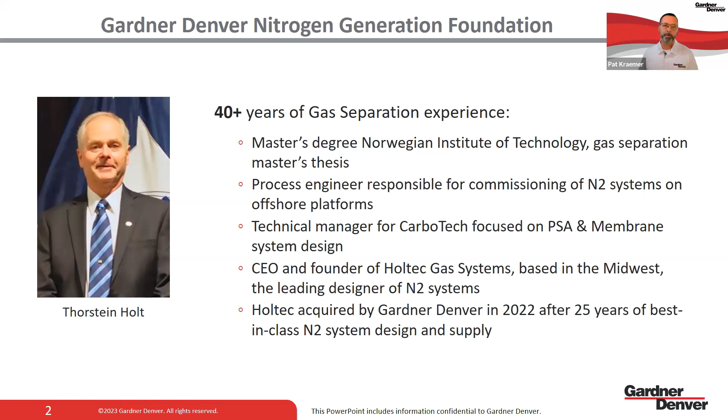Now let's show a little video.

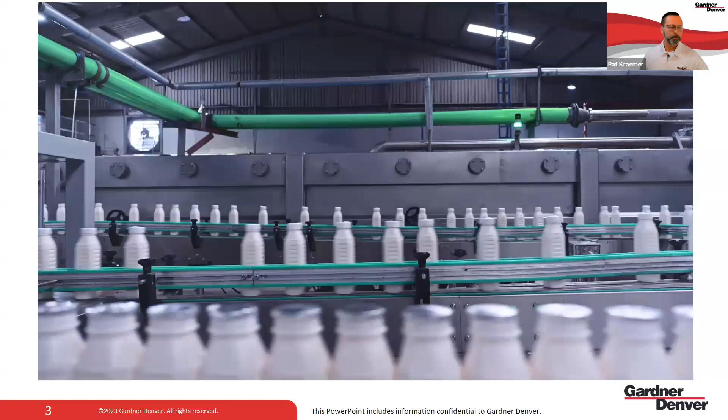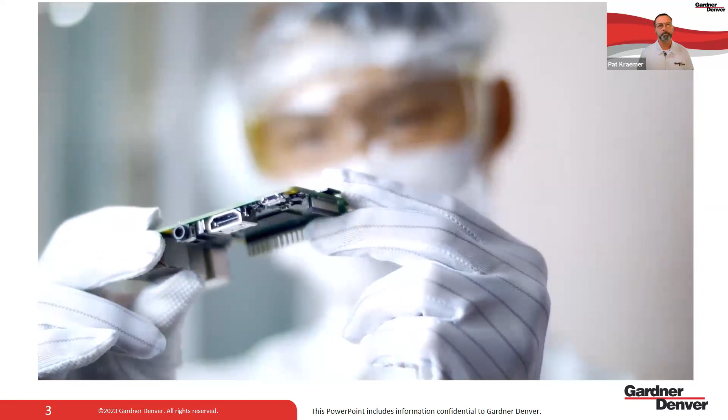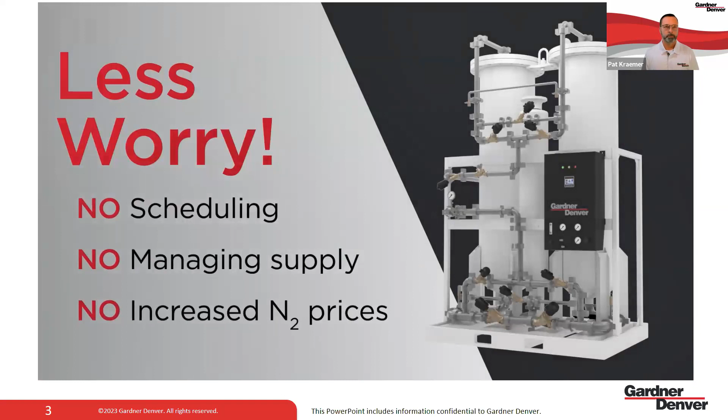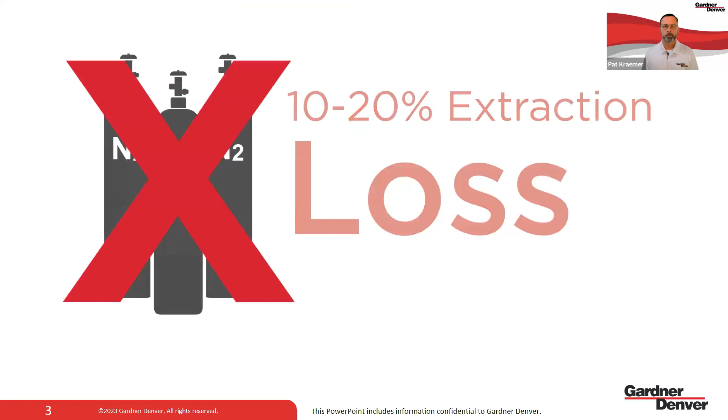When nitrogen is critical to your operations, you can't afford to worry about scheduling deliveries through an unstable supply chain or managing fluctuating costs. Traditional delivery can be unreliable and less flexible than your processes require. Fortunately, Gardner Denver has a full line of on-site nitrogen generation solutions that give you exactly what you need, exactly when you need it. You can lower your operating cost and eliminate waste while still preventing combustion, corrosion, and product spoilage. Whereas 10 to 20% of bulk nitrogen is typically wasted during extraction from cylinders, on-site generation prevents this waste, reducing usage and cost. You can free up valuable floor space and eliminate safety issues related to bulk storage.

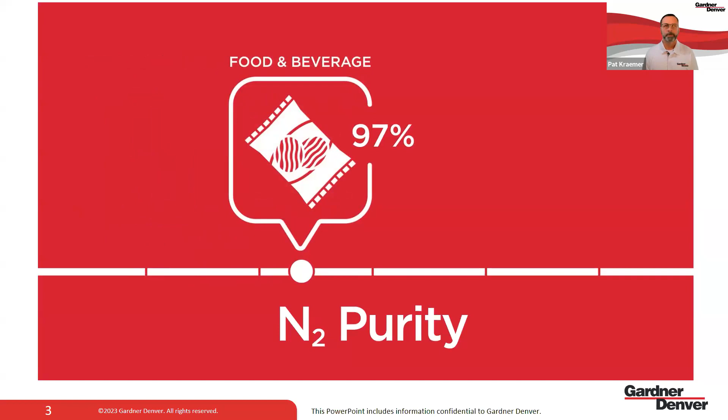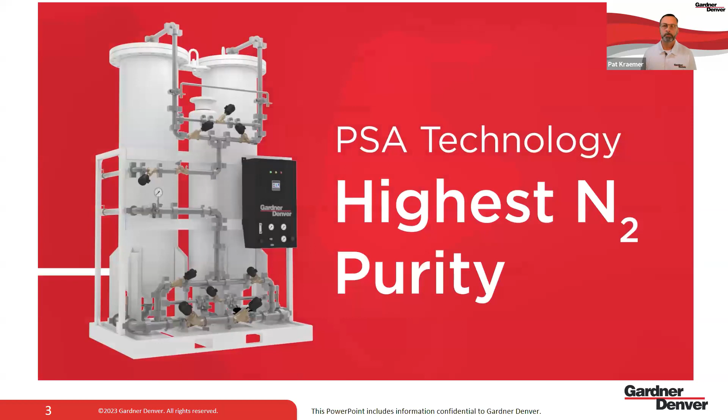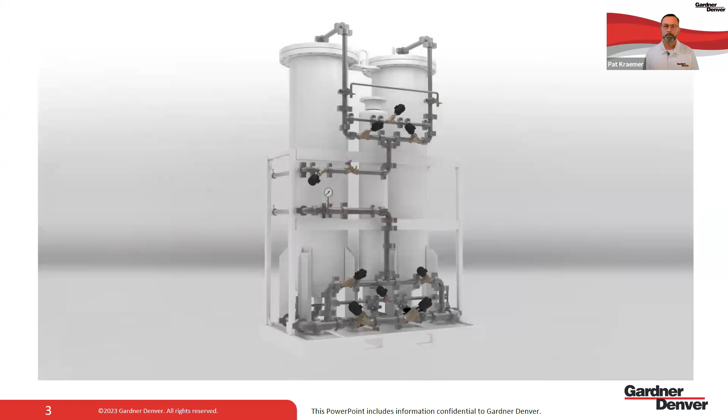And on-site generation uses the freely available nitrogen that exists in the air, so your only expense is the cost of operating the system. No matter your requirements, Gardner Denver has a solution to meet your precise demand. With purities ranging from 95% to 99.999%, you can select pressure swing adsorption (PSA) technology, which drives down operating costs and delivers purities above 99.5%, or you can select membrane technology for lower initial costs. Like all products from Gardner Denver, you can expect the highest quality and reliability. Our generators come pre-assembled and tested at the factory, and are covered by standard extended warranty to keep you protected for 24 to 30 months.

Declare your independence from purchased bulk nitrogen with reliable on-site generation for applications such as blanketing, laser cutting, packaging, and more. Contact Gardner Denver today to see how we can help you identify the right solution for your needs.

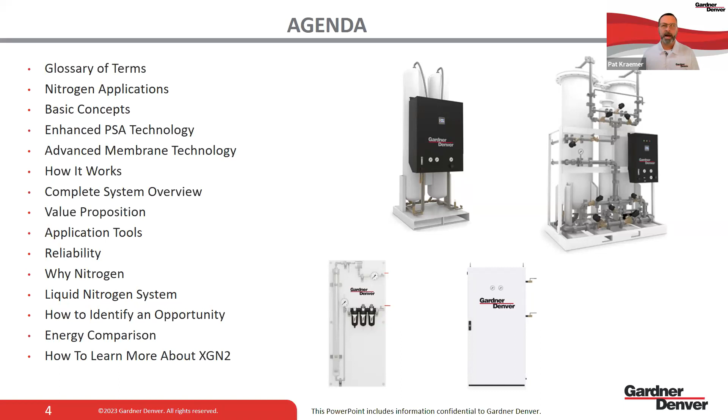So some of this may be review to some and new to others. We're going to talk about some of the nitrogen applications, basic concepts, how a nitrogen system works, application tools that Gardner Denver has at the ready to assist you to size and select correctly. Why would you want to look at nitrogen, energy comparisons, and how to learn more about our products. Without further ado, let's take off.

First of all, some glossary of terms. PSA for pressure swing adsorption, akin to a large desiccant dryer. Membrane technology. When you're looking in the industry, IG is your industrial gas company, so maybe you're getting bulk nitrogen delivered that way through your IG supplier. N2 obviously means nitrogen. When you start to look at capacities, you're going to hear SCFH or SCFM, which you're going to look into when you're sizing equipment, or if you're going to your local Gardner Denver distributor to have a system sized, they're going to need to know some of that criteria. Okay, sale of gas, sale of equipment. We're not going to spend a lot of time here.

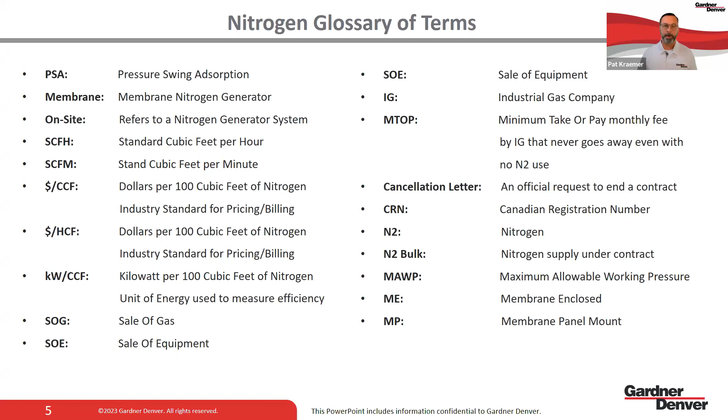So let's talk a little bit about the markets. Again, some of you on the webinar may already be in the laser cutting business, or a food and beverage manufacturer, or you're in petrochemical and paint. These are some of the top industries that we see obviously looking to generate their own nitrogen. Hopefully you're going to look into that more today with us.

Other industries like food and raw materials, tobacco and grain storage. We all know when we open up a bag of chips, a peanut can, or maybe a bottle of beer, what we don't know is that there's nitrogen stored on top of that to preserve its freshness, purity, and shelf life. And that's why some of you are probably on this webinar today. These are some of the common industries that we see for nitrogen use and obviously for nitrogen generation.

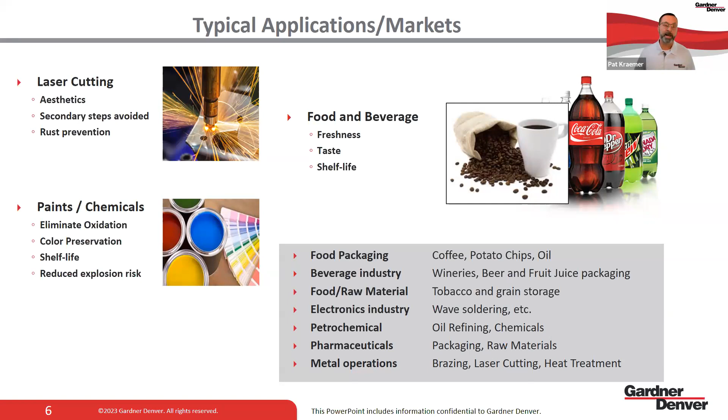Now, nitrogen, the what and the why. Well, what makes up the air we breathe? The air that we see right now is 78% nitrogen, 21% oxygen, with a small amount of noble gases left over. Nitrogen is an excellent inert gas with a low O2 content. It's used to help in preventing combustion and explosion. It helps to save materials. Obviously, we've talked about spoilage of foods and raw materials.

And for those who may not know that you generate nitrogen, or you're looking to generate nitrogen in your plant, or you actually use it, the traditional sources of supply of nitrogen are: maybe in your plant, you see a cylinder gas bottle, or a mini bulk dewar, or you'll see large bulk nitrogen tanks out the back. That's a dead giveaway that you are a nitrogen consumer. And now it's time to look at generating your own, okay?

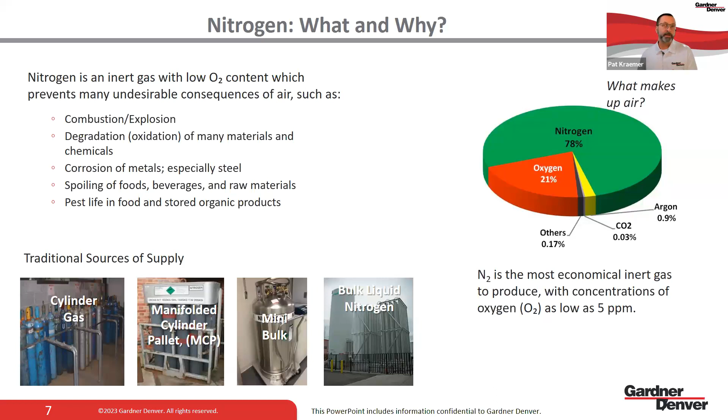So what are the basic concepts of a nitrogen generator? Well, air is 78% nitrogen, so it's freely available. So let's use it. Through the adsorption process, smaller O2 molecules will be captured by the CMS media, akin to desiccant in a desiccant dryer.

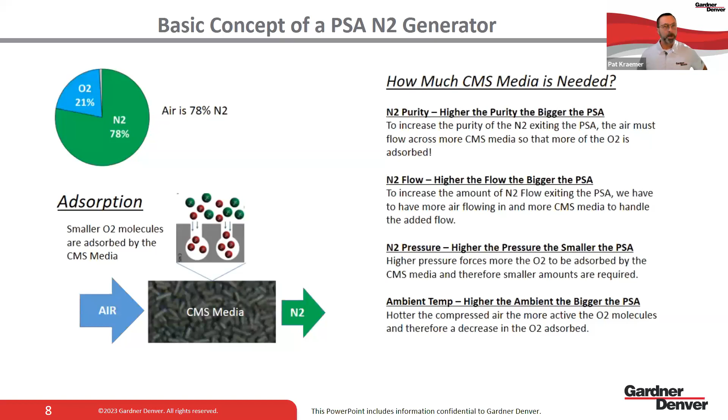So when you're looking at sizing a system, you may ask yourself, how much media is used, or how is a PSA system sized? Well, if you have a higher purity, the bigger the PSA, right? If you have a higher flow rate needed, the larger the PSA. So that is going to determine how your systems grow from small to large. An important factor you work through with your local Gardner Denver distributor is, what's the ambient temperature? Just like any air treatment products, the higher the ambient temperature, the larger the PSA system. So when you size and select, make sure you're realistic about your sizing goals.

Now, looking at our XGN2 model specifically, our enhanced PSA technology, the product offering that your local distributor can show you, it is produced from 1 to 2353 SCFM in a single unit. If you have larger flow rates, your local distributor can help you put units in parallel, right?

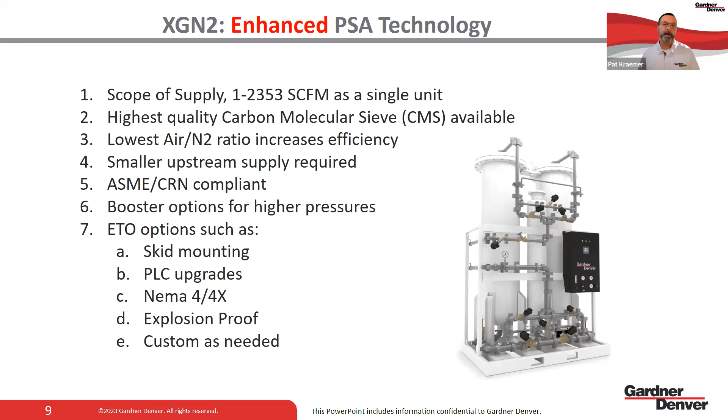Taking a further look at some of these standard offerings, when we look at purity rates, generally PSAs are used in the 95 to 99.9995 range if needed. Large flow rates, great temperature variance. An ideal temperature range for any piece of equipment is always that 70 degrees, which nobody really sees, but just know that's our best operating point. And obviously high ambient temperatures up to 110.

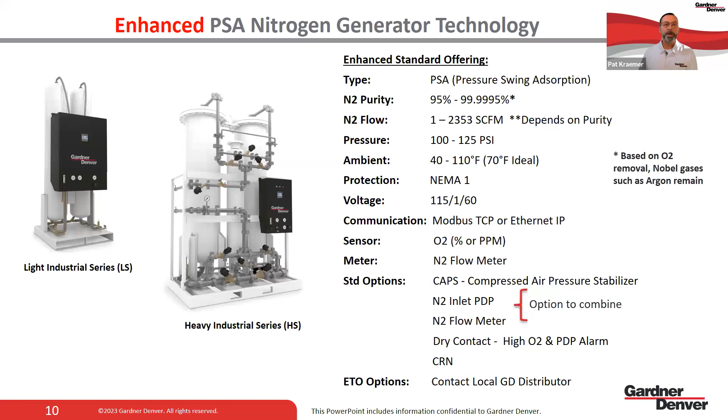Standard options on the product include a CAPS option, different flow meters, CRN if you're going into Canadian regions, and other options available. Our product line includes an LS and an HS, depending on size ranges. And remember, based on O2 removal, noble gases such as argon will always remain in a nitrogen generation system. So if you are an argon-free user, talk to your local distributor and they can assist there as well.

Moving forward, there's the light industrial series, or we call it the LS. These are usually smaller generators up to 153 CFM. Smaller plug-and-play units can fit right through the standard manway door, so it's easier as an after-the-fact install if it's not a greenfield site to roll one right in the doorway. Most often found in food and beverage applications, laser cutting, and pharma.

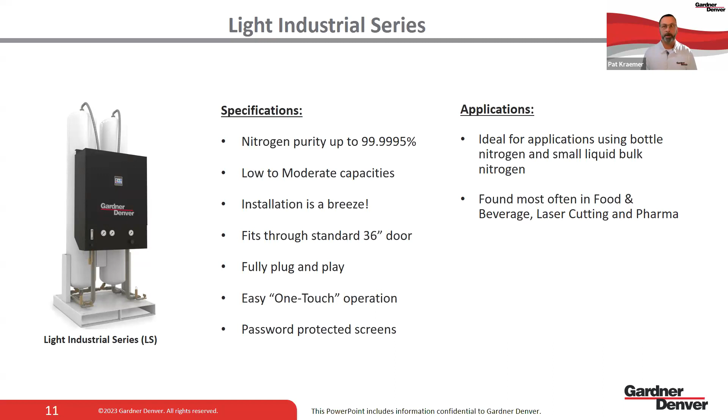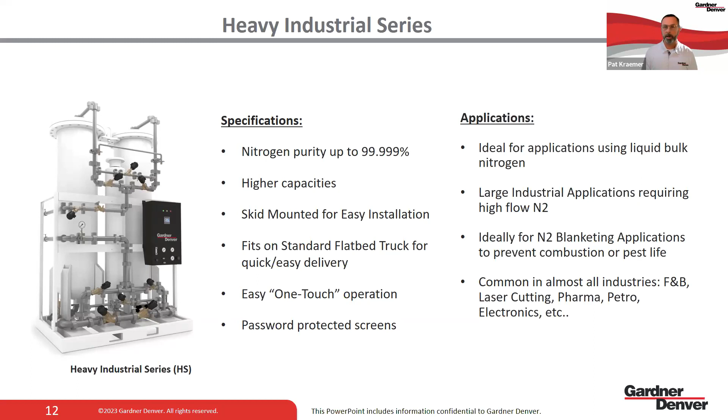When you go above 150 SCFM of nitrogen needed at site, then we go into PSA, or pressure swing adsorption. Nitrogen purities can go all the way up to 99.999, or 99.9995 if needed. These are larger systems, skid mounted, and ideal for applications using bulk N2, larger flows, larger blanketing applications, and are most common in food and beverage, laser cutting, pharma, and petrochemical, et cetera.

Now, if we look at the PSA system, be it an LS or HS, some key features are options of NEMA 4 or NEMA 4X, pressure dew point meters, since you want to read the pressure dew point of the air going outside of the generator, and flow meters, either standard or optional depending on the size, because you want to monitor what flow you're seeing. Maybe you want to send that back to a whole house system or monitor that at a control room. There are dry contacts for monitoring, and alarms for high oxygen, since if something's going wrong, you want to monitor the system and see if there's a higher oxygen content, meaning we may have a system problem generating nitrogen.

And obviously, a caps option. If your demand is a little bit intermittent, depending on the upstream equipment you're needing to use, whether it's a fixed speed machine, you may want to add a caps option, which helps to balance some of the load in those times of low load, which helps to not cycle your upstream compressor too frequently.

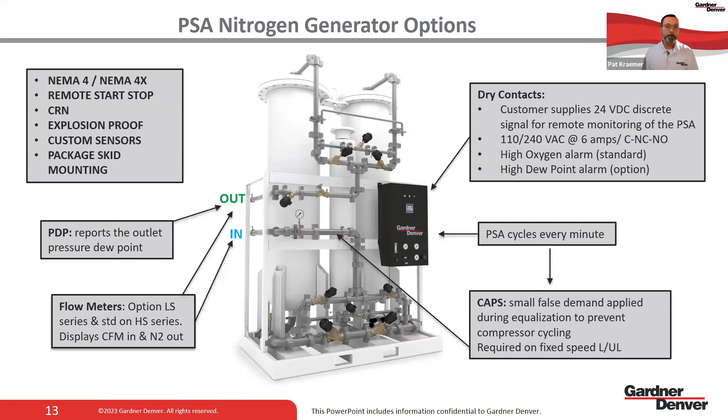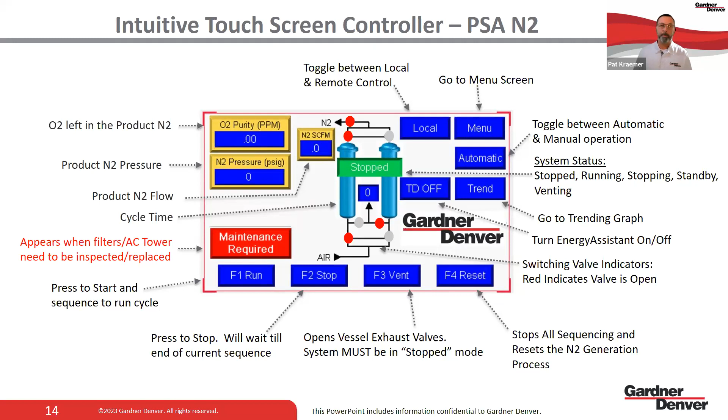Now, there's a lot going on this screen. I'm just going to touch on some of the telemetry that can be monitored. With a PLC option from Allen Bradley, there's a lot to be monitored. There's a menu screen, you can do trending and graphing, and you'll know when the nitrogen generator is stopped or started. You want to verify your purity rate in parts per million or percentage and know your N2 pressure. And there's a nice big red flashing light if there's maintenance required, which appears when filters or upstream equipment need to be changed. A nitrogen generator is only as good as the preventative maintenance done upstream. A lot of data going on here to monitor the telemetry of your PSA system.

Now let's pause here for a minute. This is some live animation of the actual generation process. In the production process, compressed air goes in at the bottom, into one of the two towers, going across the media. Oxygen flows out of the air, nitrogen flows out the tower, and N2 exits at the top for continuous 24/7 use. No longer do you have to worry about a delivery truck not coming on time.

Now we're going to regen the other part of the tower. Simultaneously, one tower is being depressurized, and we're capturing O2 out of the media. O2 exits out the generator through a muffler into the atmosphere or into your room. A small portion of N2 is used to help that purge process, but that portion is taken into account when your system is sized.

Then your pressure is equalized. The two towers are then open to each other and stored, with pressurized nitrogen equalized between both. Towers then switch, and we lather, rinse, repeat, continuing this process 24/7, giving you a reliable stream of nitrogen to be used at the plant.

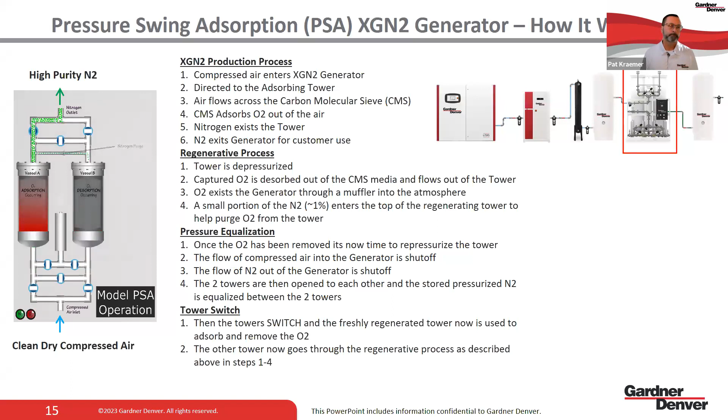Now let's talk a little bit about what should be required upstream of the system. So if you're on this webinar and you're thinking to yourself, well, what do I need upstream of a Gardner Denver generator? Well, it'll be perfect. We have a complete portfolio of upstream equipment.

So the first thing you need is an air compressor, be it oil flooded or oil free. You then want to filter out that air. You want to dry it, filter it again, go into an activated carbon tower. Now here's a note. If you are an oil flooded or oil injected customer, you need an activated carbon tower. If you have an oil free compressed air stream, no need for item 4.

We will then filter the air one more time, go into a storage vessel before we go into the nitrogen generator. And then we have an N2 storage tank. And lastly, a particulate filter downstream. Whether you have this system already installed, these are the requirements that you need before a PSA generator. Or if you're looking for the complete upstream system, your local Gardner Denver distributor can help you size and select.

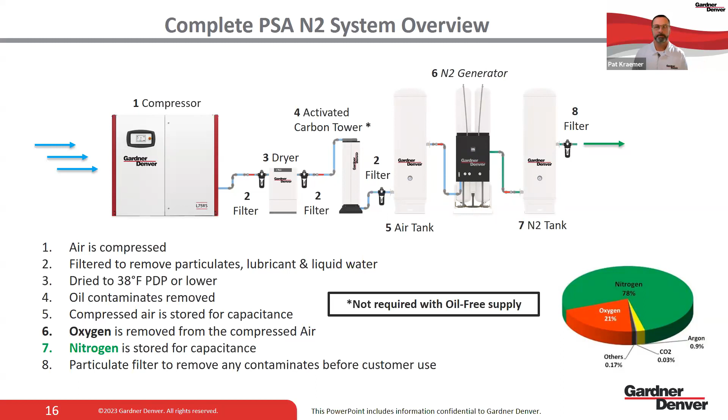Now, a little bit about value. And this is probably why you're looking into generating your own nitrogen today. We provide a very high efficient system. As we stated before, we have one of the lowest N2 to air ratios on the market. Very high dense packing of our CMS material, plus an energy assist variable capacity system to help save air if your demand fluctuates and it isn't 24/7, 100%.

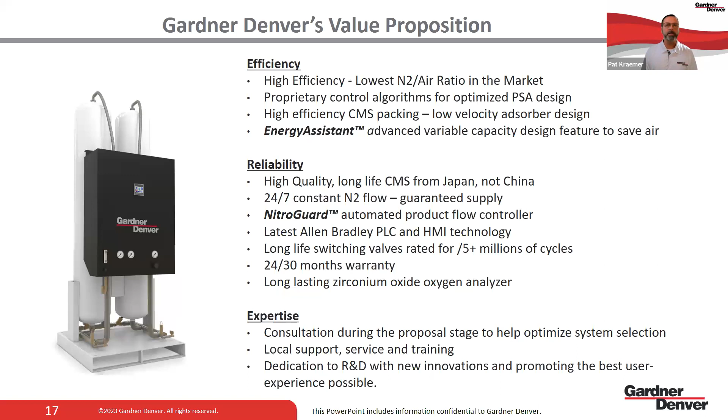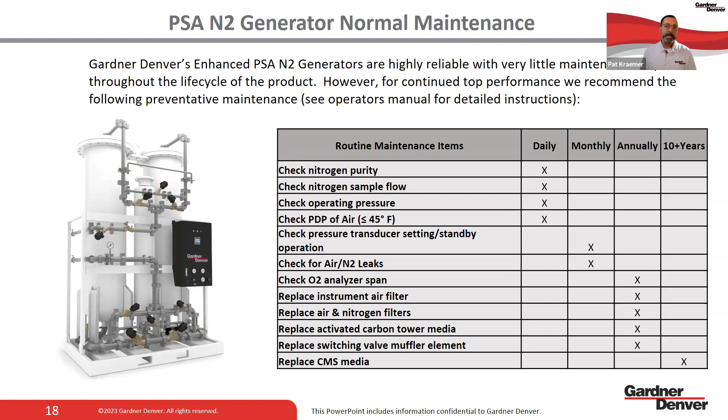Now, let's talk a little bit about maintenance. You're probably wondering, well, what do I really have to do to a PSA generator? Well, on the nitrogen side for a PSA system, being a little bit bigger, there are going to be daily checks you have to go through. There's monthly checks. Annually, you have to replace an instrument air filter on the generator itself. You're obviously going to replace your air and nitrogen filters annually, your carbon tower media, and some small mufflers. If you notice, we're not looking to replace the CMS media, which is your biggest dollar item, for 10 plus years. That's because we're committed to the highest quality of CMS on the marketplace.

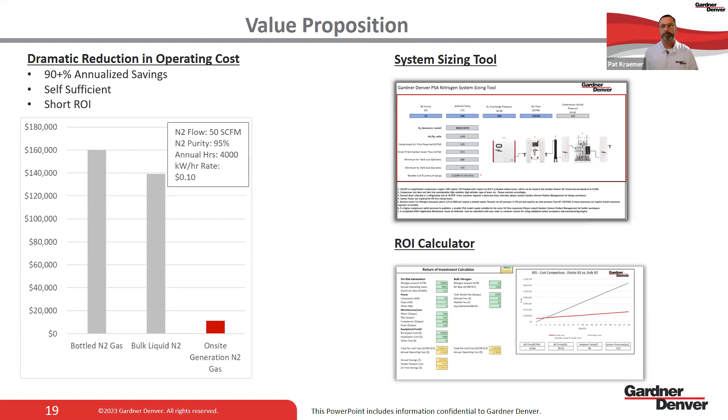Now, a little bit more about the value proposition and some of the tools your local Gardner Denver distributor can assist you with. First of all, there is an excellent system sizing tool with a built-in ROI calculator to help you see how fast your return on investment is going to be. These tools are going to be available to you through your local distributor. A little bit more about our energy assist. Obviously, when demand is intermittent, we want to reduce your air consumption, which reduces your energy consumption on the front end, saving you money going forward.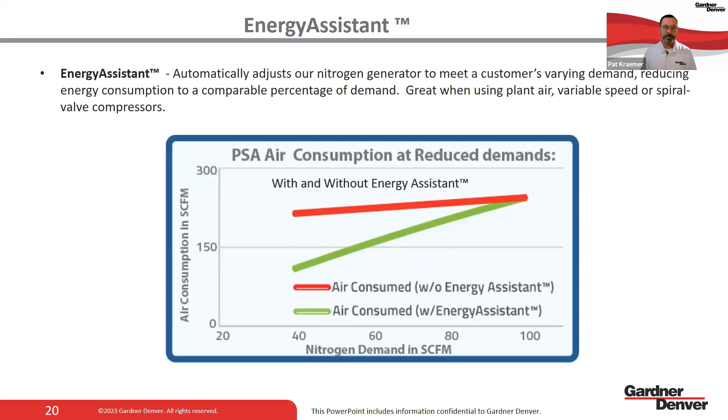A little bit more about reliability. Looking at some of the actual components on our systems. Again, we've talked about the highest quality of CMS. That's the lifeblood of a PSA generator. We adsorb more O2 faster than we adsorb N2. A smaller diameter particle size, a long life compared to others, 3 to 5 within the industry, high reliability, high quality switching valves, and again, one of the best in the marketplace.

Smaller compressors, dryers, and filters upstream mean smaller capital acquisition costs, as well as shorter ROI and better energy efficiency throughout the year. And again, we manufacture most of the major components on our systems.

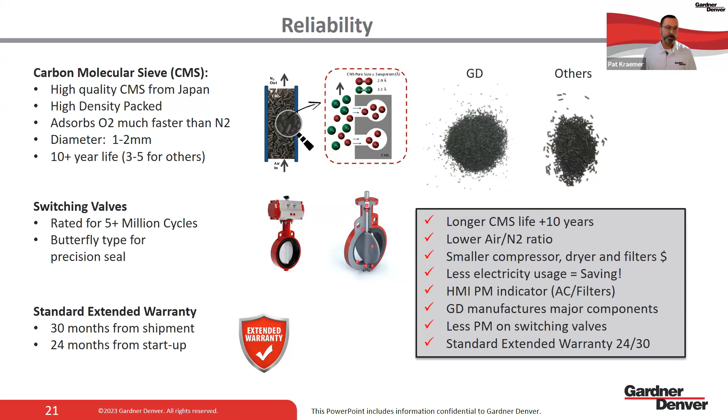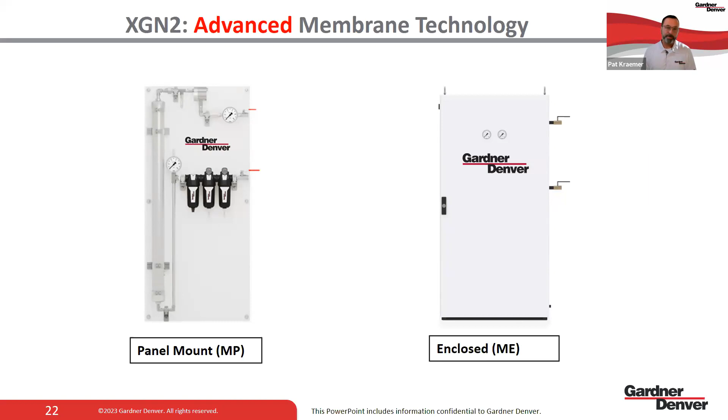We're now going to jump to membrane technology. We've stopped with PSA, which are larger flows, and membrane technology systems are a little smaller in size and are also used on lower purity rates. And what you see in front of you are two versions. One, if you want an open panel mount, gauges and dials, and here you'll see filtration built on board. Or if you want it enclosed, we have enclosed options as well.

So membrane systems, again, are used for smaller purity rates and smaller flow rates because the membrane technology does not extend that large to be economical, okay? And we'll talk about how your local distributor can help you determine if you're in the middle of a membrane or a PSA selection and what that means to you.

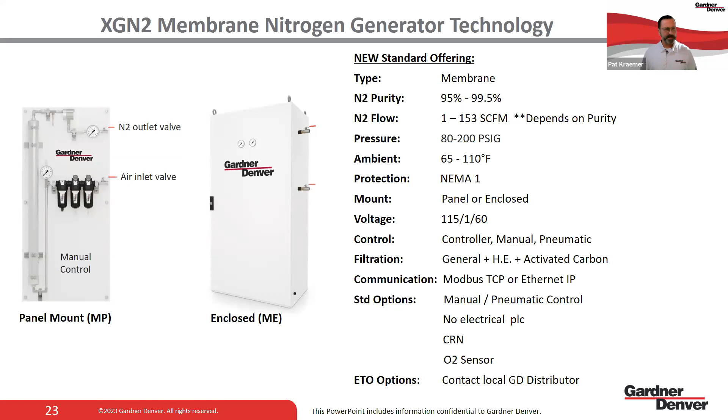A little higher pressures, NEMA 1 protection, again, panel or enclosed versions. These versions are generally with gauges, manual control. Some people will opt for a PLC option. It's really dependent on what you want to do and what you want to monitor back at your plant. A little bit less on the option level, a little bit simpler system to operate.

Now, if you look at the touchscreen controller, if you opted for an HMI option, there's not as much data going on or not as much I/O to monitor, but you will monitor the key things like your percent oxygen, your N2 pressure out, whether you're started or stopped. You will have a systems menu, a filter maintenance menu, and your total run time hours.

You can still send this data back through Modbus TCP or Ethernet IP, however you want to send it back to your whole house system, monitoring your membrane system going forward.

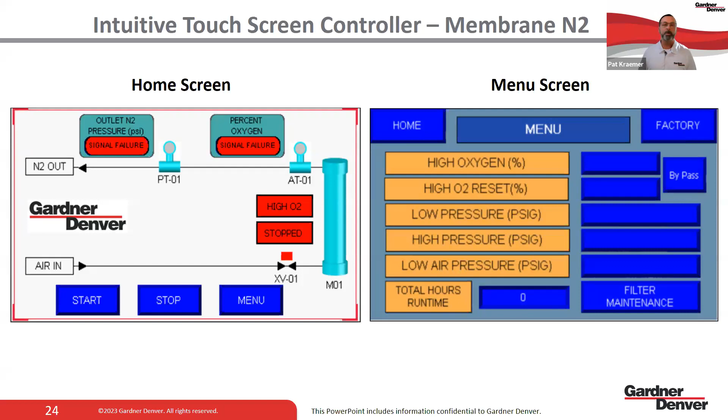Now, we're going to park here a little bit and show a little bit more about how membrane technology works. Think of it as a filter, right? Compressed air goes in. Nitrogen molecules are about 3% larger than an O2 molecule. So what happens is the smaller O2 molecules permeate through the walls of the fiber itself. And they are what is expelled outside the top of the nitrogen membrane. The larger N2 molecules continue to flow.

Oh, excuse me. We lost our video there.

Larger N2 molecules will continue to flow downstream, giving you a clean, dry, filtered process downstream of your N2 tank. And if you notice, the system sizes get a little smaller here in our example, okay? Membranes, again, are better, and this video is going to stop again, so I apologize.

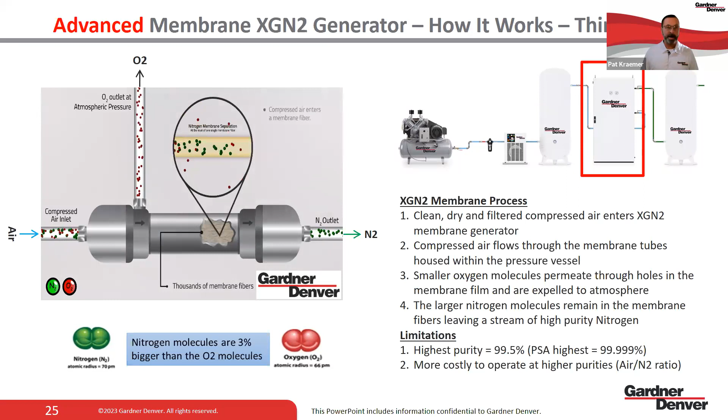Now, a little less functionality going on here because remember, the nitrogen membrane has onboard filtration already, so your upstream system is a little bit easier. Air is obviously needed from a compressor, going through a dryer, into your air storage tank, into your nitrogen generator with your 3-stage onboard filtration, and then out to your N2 tank. You should always have a particulate filter downstream.

One key note that I want to point out is in our nitrogen generation systems from Gardner Denver, the dryer that you see in number 3 is always a refrigerated air dryer. We do not require a desiccant dryer like some of the other vendors on the market, keeping your capital acquisition costs down, as well as keeping your system a little bit more simple to operate.

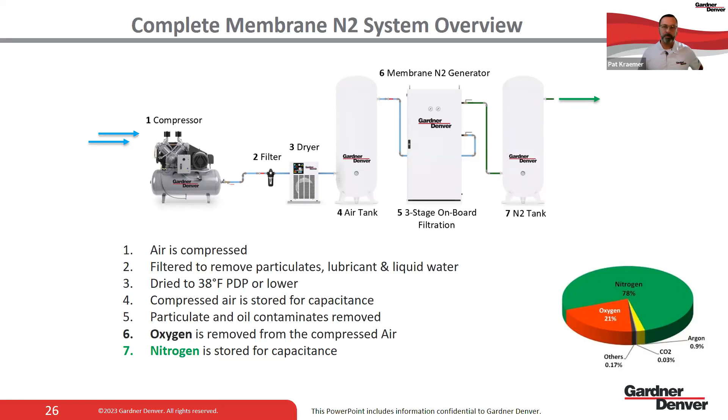Now, again, the value proposition here is a little bit easier to look at. It's a little smaller system to operate. You can see a much smaller size. Even the largest N2 membrane generator is 77 by 49 by 24 in a panel mount side, enclosure mount. Used for ag applications, liquid sparging, biofuels, fire suppression, standard 3-stage filtration, and again, 24/7 guaranteed N2 supply.

That's probably why you're on this webinar today. It functions much like a filter. Again, a 10+ year life on your membrane system itself. Manual inlet and outlet valves, and a great standard warranty from Gardner Denver.

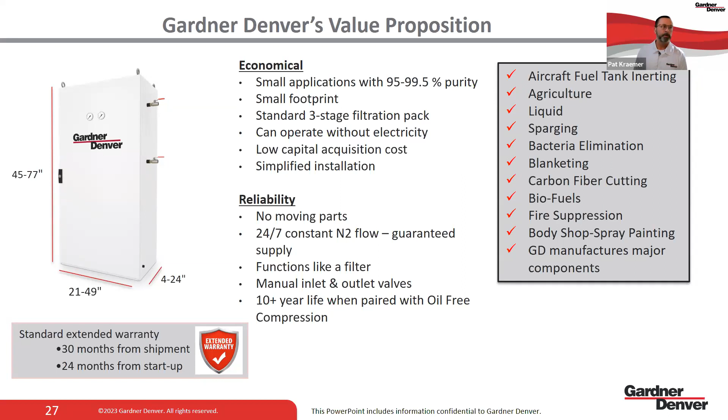Let's talk about maintenance. Maintenance is actually a lot easier than the PSA, which is easier to begin with. Really, annually, you're just replacing the filter elements on the membrane generator itself. Now, you still want to do your routine maintenance annually on all the upstream equipment, your compressor, your dryers, your filters, your carbon tower if needed. But really a low maintenance system. And you can see the membranes and the PSAs are helping you with your return on investment because your annual maintenance costs are extremely low.

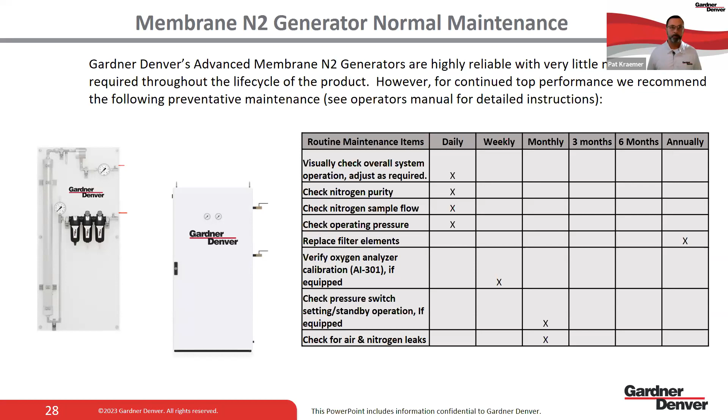Now let's talk a little bit about how you get the right system. Getting the right system starts with obviously knowing your operation criteria, but talking to your local Gardner Denver distributor, they have a nice application worksheet. So they're going to ask you some questions. They're going to ask you, well, what's your purity? What temperatures, what pressures, the things we talked about.

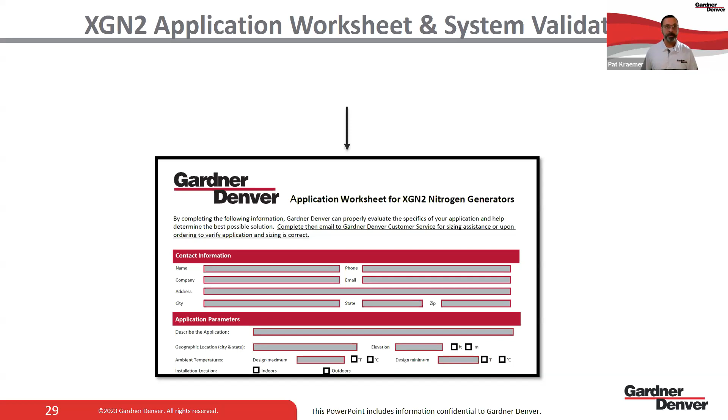Once that's done, your local Gardner Denver distributor is going to submit that to product management. Heather and myself are going to make a first pass engineering review, most likely myself. Once the application is validated and vetted, I'm going to go back to the local distributor and say, your system sizing is right on. That's your first check. Now a quotation can be issued to you.

Once a quotation is done, we're going to ask our local distributor to provide all that documentation back to the customer service group, and it's going to go down to Thorsten's group. And they're going to validate the system again to make sure that we've all done our jobs right, providing that last final check. If there's something off in the size of your system, they're going to stop the process. We're not going to start manufacturing. We're going to send that back, usually through customer service or myself, and we're going to see if we made an error to make sure that systems are checked and your system is sized correctly.

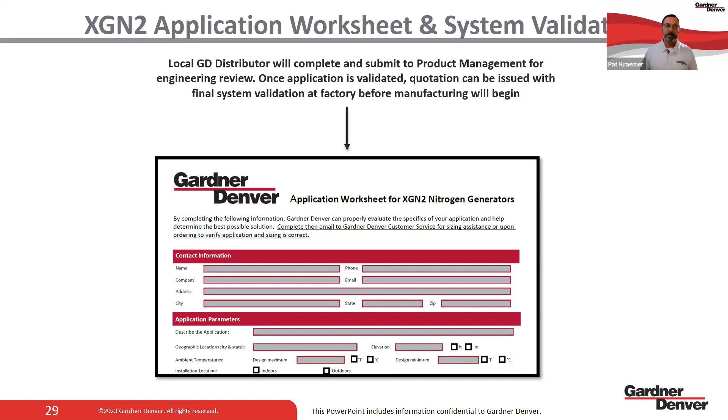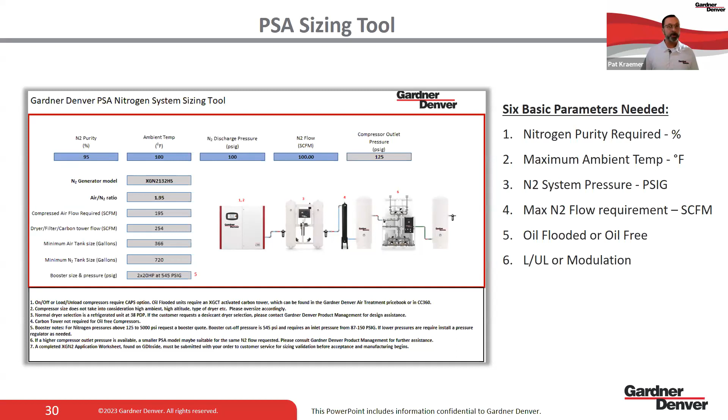That's the first part. The other tool is a nice selection sizing tool, where your distributor is going to ask you those basic questions. What purity? What pressure? Are you using an oil flooded or oil free system? What type of compression? Again, the goal is to get your system sized correctly. So when looking at these parameters, think of your worst case scenario. Do you have a compressor room which is temperature controlled? If not, you're going to be at the higher end of the spectrum, meaning your system sizing is going to go larger. So don't be surprised.

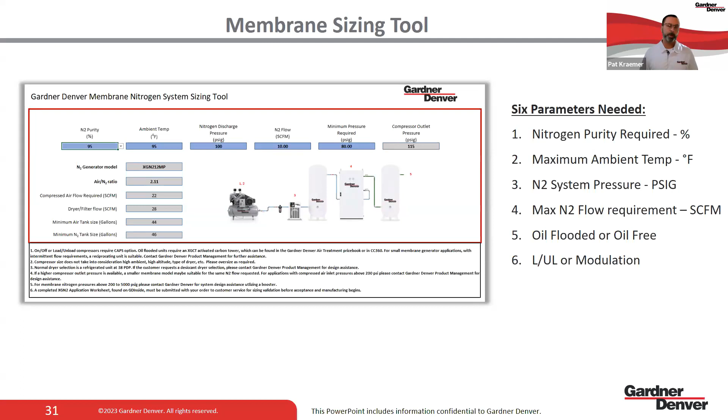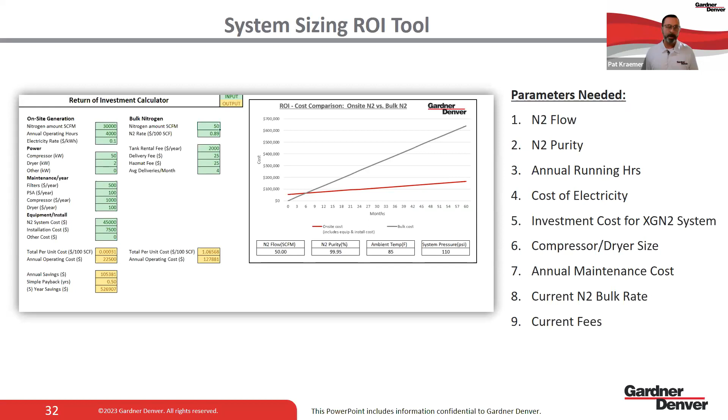Same type of tool exists for membrane, right? Low pressure systems, high pressure systems. If you're a low pressure customer, great. If you're a high pressure customer, we have booster applications and booster packages to go along with the standard system that your local distributor can assist with. And again, a system sizing tool to help you show management that payback so that you can easily get out of having liquid nitrogen delivered at a purity rate that's higher than you really want and save some money going forward for you and all of your operating divisions.

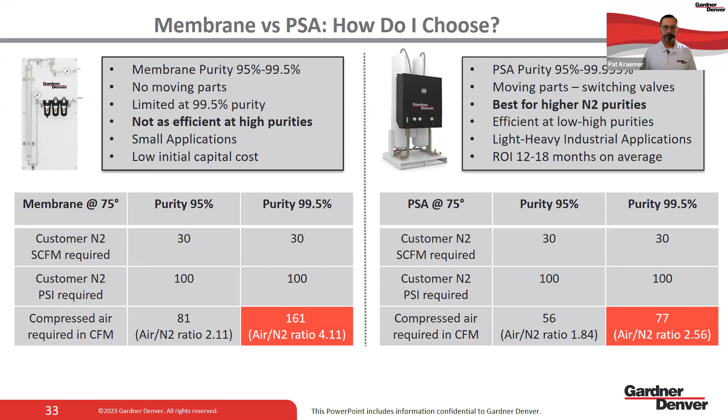Now, we're coming not to the end, but close, and we're going to recap again nitrogen, what and why. Well, it's because it's free in our air. Why not utilize something free and help you save money at the same time? It's an inert gas. It helps you prevent many undesirable consequences: combustion, degradation, spoiling of foods and beverages, and obviously eliminating pests in food and organic products.

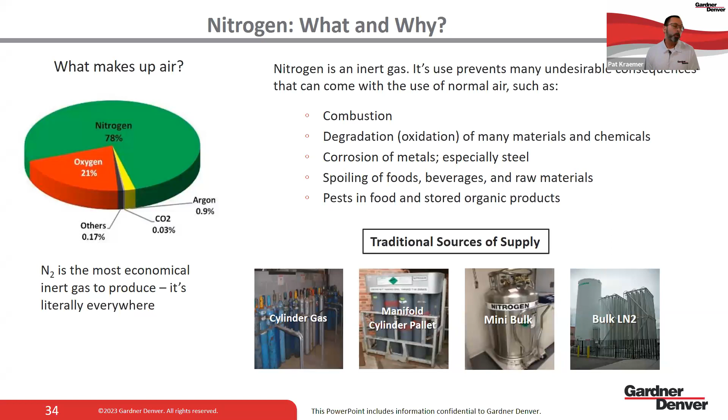And again, you may be walking around your own facility, and here are traditional sources of supply. Bulk, large facilities out back where you're seeing trucks drop and top off, where you're seeing up to 10 and 20% waste that we've talked about in the video. Maybe you're a smaller user and you see a manifold of cylinders in the back that get delivered every other day because you're burning through them. Well, here's where we're going to help you generate your own nitrogen and save some money for your division.

Now, this may be a repeat or something you've seen in your plant, but this is what bulk storage looks like for most people. Think of a Yeti cooler, right? You have an outer shell, a vacuum between the two, and an inner shell. N2 gas is used to pressurize the tank. Your liquid N2 is delivered by your vendor. It's converted to N2 gas.

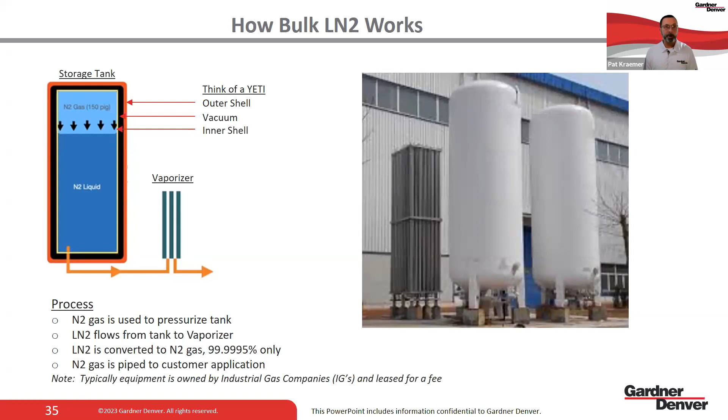And a key point that I want to talk to you about is you see a note of 99.9995. So when you get a delivery, you're probably getting a purity rate much higher than you need. If you're a customer who needs 95% purity, you're buying 99.999 and up to 5 from your vendor, which means you're overpaying for something that you don't need. Now is the time to go back to the purity rate that you really require. Generate it yourself.

Another slide. How do you identify your opportunity? You've walked around your plant, you've seen all this. You'll see green stickers, or maybe you've walked in your plant, you looked up overhead, and you see green piping. That means you have nitrogen within your facility. Large white vertical tanks. You see trucks coming in and out, right?

Questions you want to start asking yourself, and maybe you've started doing this already in this webinar, and what's prompted you to be here is, well, if you're getting it delivered, when does my contract expire? We can help you with cancellation letters. Do I really need that high of a purity rate? What am I paying per bottle? And maybe your local Gardner Denver distributor is going to ask you that, to look for some monthly costs or bottle costs so they can help you work on that return on investment.

And then really you have to finally ask yourself, are you really ready to eliminate and mitigate the risk? Because that's what we're talking about. You're here because you don't want to rely on others. You want to be self-reliant. And that's where we can help you moving forward.

Hey, Pat, I'm going to break in. We have a question, and I'm going to give it to Torsten. So okay. Want to unmute yourself, Torsten? We've got a question. This is a good one. Would dairies producing milk use nitrogen, therefore being a potential customer? So like a dairy farm, would that be a good customer?

Yes, like one of our customers is Fairlife. They use it for their milk products. I believe the purity they use is 99.5%. The food grade nitrogen is nitrogen with maximum 1% oxygen. We typically stay within 0.5% of oxygen or even 0.1% oxygen. That's most commonly used. So yeah, that's a good application. Okay, thank you, Torsten. Thank you, Heather. Torsten, great question.

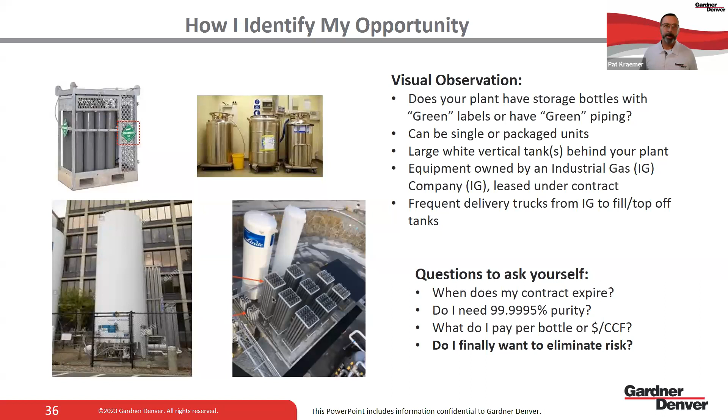So let's talk a little bit about energy, right? And Torsten, I may need you to chime in if needed, but when looking at the comparison to generate 100 SCF of nitrogen, liquid nitrogen versus generating yourself with our XGN2, you can see it's a constant flat line. 2 kW per 100 is needed. But when generating on our own, you will see half that.

Now, we go up a little bit, obviously, towards the end of this curve when you get to 99 and 99.5. But the most common range of nitrogen purities, and maybe Torsten, unmic yourself here, would you say one of the most common ranges is really 95 to 99 tops? We see probably a lot of 99 to 99.9. Okay. But also then for like laser cutting, it's 99.99, and also beer. When they mix it with CO2, they were looking at 99.99%, and also electronics, it could be up as high as 99.999. So it varies, but a lot of it is more in the 99.9% range.

Okay, so even at those higher ranges, you can see that our cost to produce is greatly reduced as opposed to you producing it with a delivery, right? The electrical cost needed for that delivery process. You're going to save yourself some money going forward.

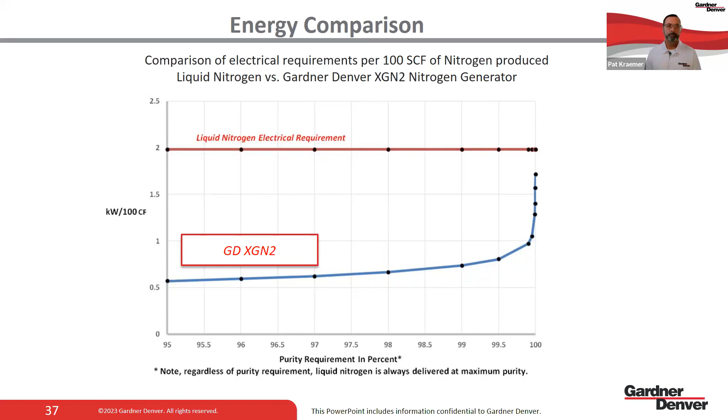And that's where you can also investigate more of your local distribution house, who can help you with the sizing and the selection, bring their expertise and some of the expertise of those who are in this panel, help you get out of a long-term contract. And the goal is to make you more self-sufficient. And the way I really see this is, what is your risk tolerance, right? Do you want to be without a delivery?

Like compressed air. If you cannot generate nitrogen for an application or a process, that part of your plant is shut down. When that part of your plant is shut down, you're not generating any revenue while you're waiting on someone else to deliver your product. So take control of your own nitrogen supply, and obviously do it with Gardner Denver's equipment.

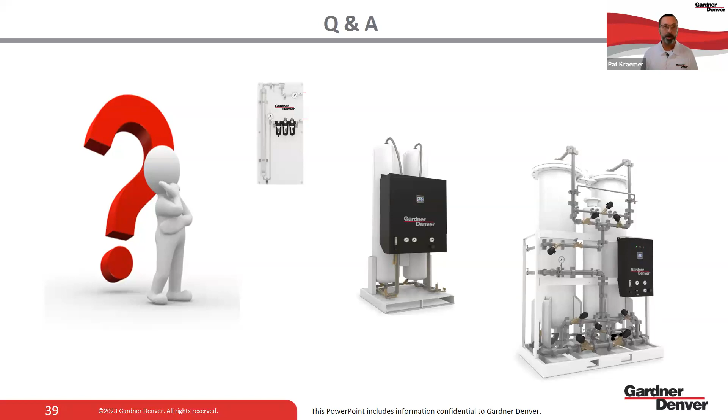We are the best in the business, and we're going to save you money while doing it. I thank you for your time. We're going to open it up for questions. There have been some coming through, but we're going to open up to the panel if we have any other live questions. And again, thanks for your time.

Great job, Pat. I do have a good question that just came through. Torsten, maybe you want to unmute. I'll give you this one as well. The participant asked, is it recommended to use food grade oil for nitrogen systems and compressors? So is it required to use food grade oil, or recommended when you have nitrogen generation in the system? So that's a great question. For food and beverage applications, we use food grade oil for sure. For all the projects we have been involved in, we always use food grade oil.

Okay, good. Thank you. Hey, Heather, can I chime in a bit? Sure. So obviously on the compression side, one thing about food grade, right? Food grade oils in the industry have a little bit of an extended life, but not as much as a lot of people think. So as Torsten stated, if you're going to utilize food grade, make sure you're replacing it on a frequency as recommended by the manufacturer. Otherwise going to food grade is nothing more than a Band-Aid to assist, right?

So like most in the industry, most are still oil flooded and oil injected. So if you're making that leap to food grade, make sure you're doing your preventative maintenance on a more frequent basis and not just using it as, hey, I have food grade, I'm good to go. Just to add that from the compression maintenance side, because I've seen that a lot in the industry as well as Torsten, hey, I have food grade and I'm good to go. But that doesn't always do it unless you're changing it on a recommended basis. So don't forget the maintenance part. Yeah, that's a good tip.